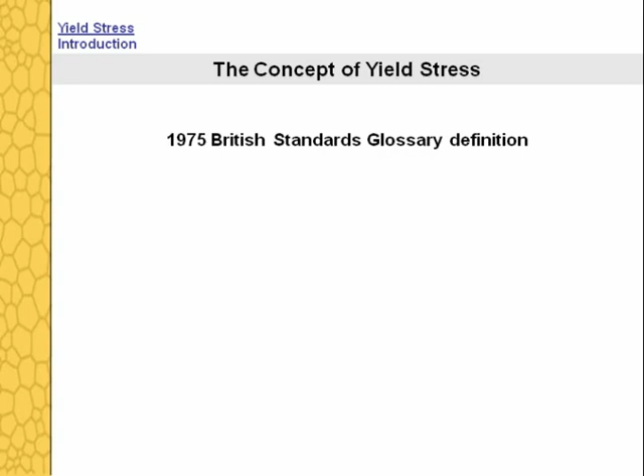It is probably true to say that the concept of yield stress is very well known to rheologists, and that most would be able to provide an acceptable definition. In this connection, the 1975 British Standards Glossary version would not be too far from that of most rheologists: it is that stress below which the substance is an elastic solid, and above it, a liquid.

It is also generally accepted that many everyday products seem to possess a yield stress, including clays, toothpastes, drilling muds, foams, plastic explosives, ketchups, all sorts of creams, and many other diverse materials.

In their book, Rheology, An Historical Perspective, Tanner and Walters point out that the concept of yield stress was apparently first described in detail by the Russian scientist Theodore Schwedoff in the late 1880s. Interestingly, Schwedoff introduced a variant of the well-known Maxwell equation of linear viscoelasticity. In this equation, sigma y is the shear yield stress.

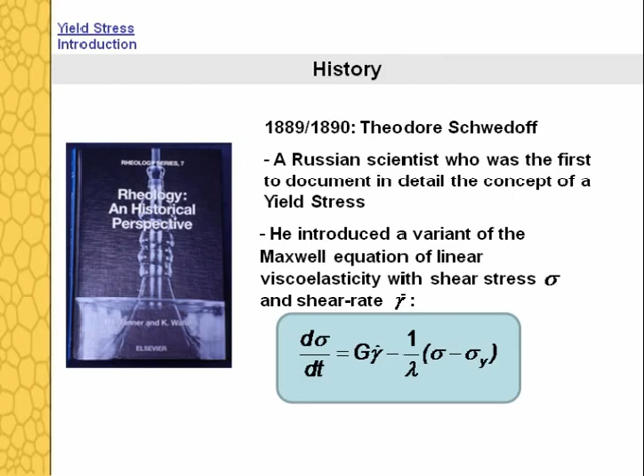Moving to the 20th century, the name of Eugene Bingham figures prominently in the unfolding yield stress story. Interestingly, it was Bingham, together with two friends, Reiner and Scott Blair, who were responsible for the introduction of the term rheology, and for the setting up of the first rheology meeting in 1929.

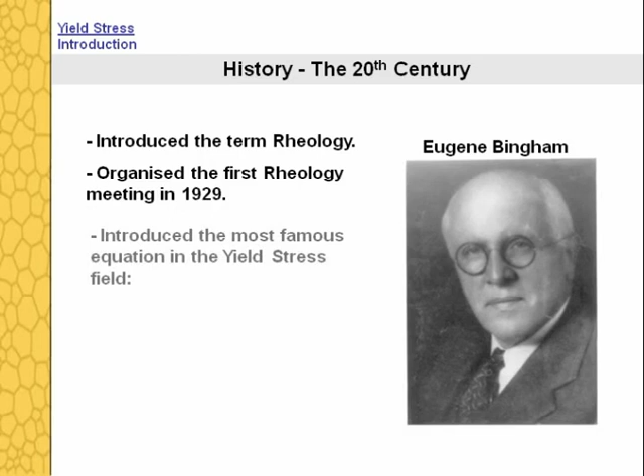Bingham was also to give his name to what has become the most famous equation in the yield stress field, called appropriately the Bingham equation, and originally introduced as early as 1916. Here, sigma y is again the yield stress, and eta p the constant plastic viscosity.

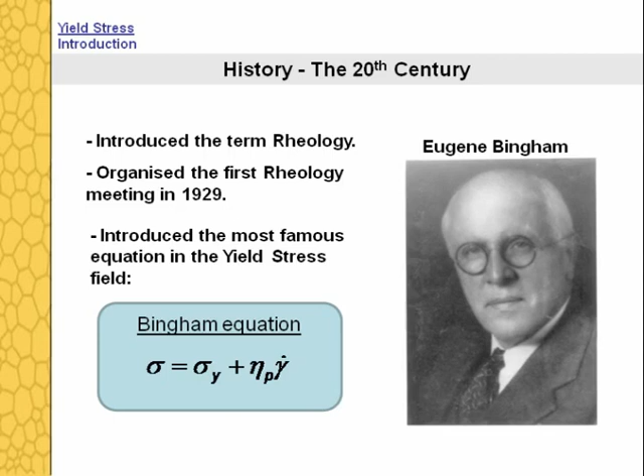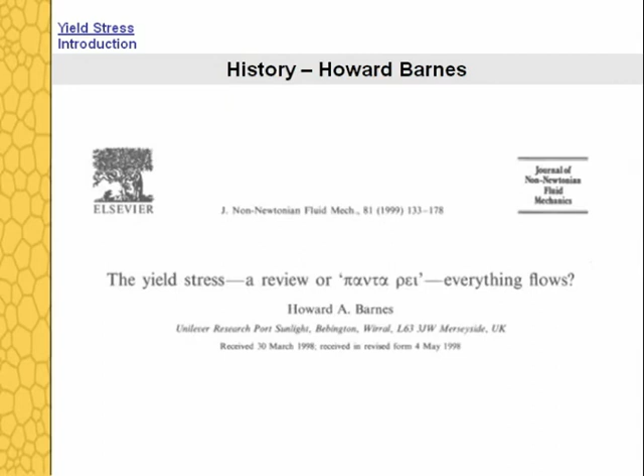Barnes has described these and related developments in a series of papers. Notable amongst the developments has been the search for generalizations of the Bingham equation, and the names of Casson, and of Herschel and Bulkley, have been assigned to the most popular.

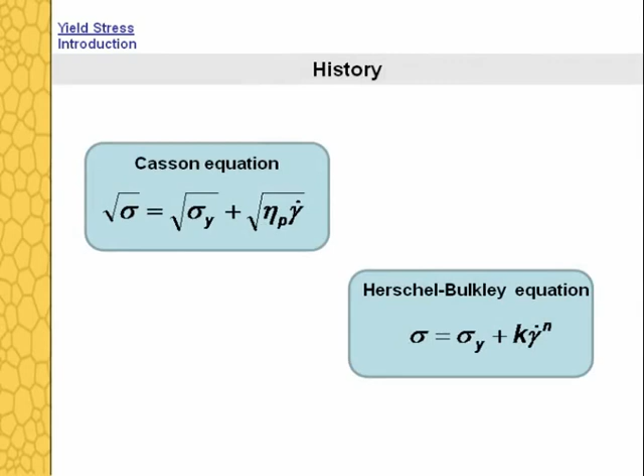Alongside these attempts to describe yield stress behaviour theoretically must be a discussion of the experimental evidence for the phenomenon. In this connection, an obvious example of a common material that seems to possess plastic properties is toothpaste, of course.

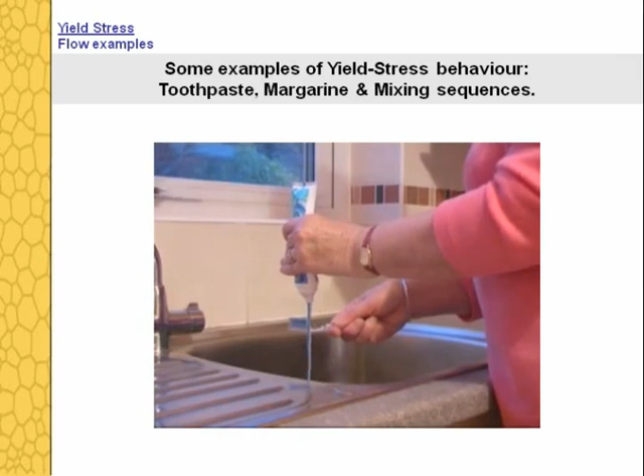For example, we expect a good toothpaste to be solid-like at rest, so that it will not flow under its own weight, in the tube or on the brush. It can easily be made to flow by applying a sufficiently high stress, and, in normal circumstances, it would have the necessary mobility involved in the brushing action.

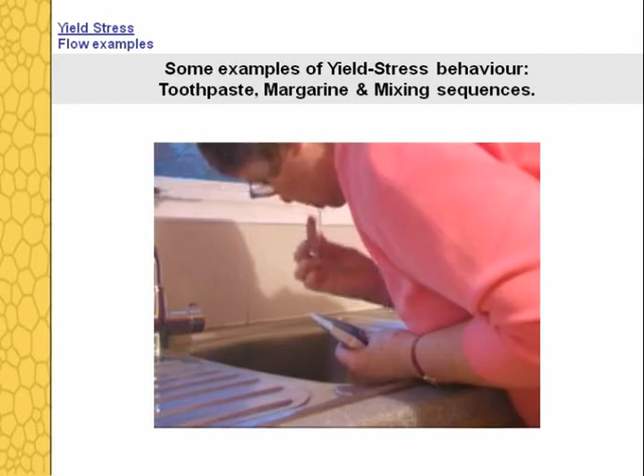Margarine is another example of a material that appears to possess plastic properties. Indeed, a good margarine must have convenient plastic properties over a range of temperatures, so that it maintains its block shape for long periods, and yet is spreadable.

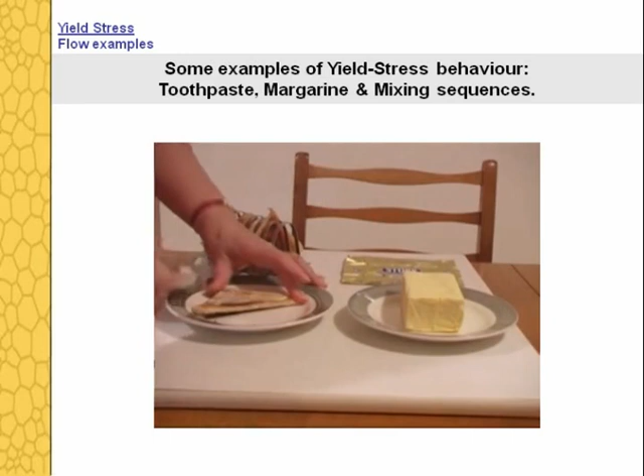Indeed, the old television advertisement made it quite clear that we should be able to spread a good margarine straight from the refrigerator. Or to quote another TV advertisement, it has to be firm on the knife but soft on the bread, i.e. solid-like at rest, on the knife, on the table, in the refrigerator, but liquid-like under the severe conditions involved in the spreading action.

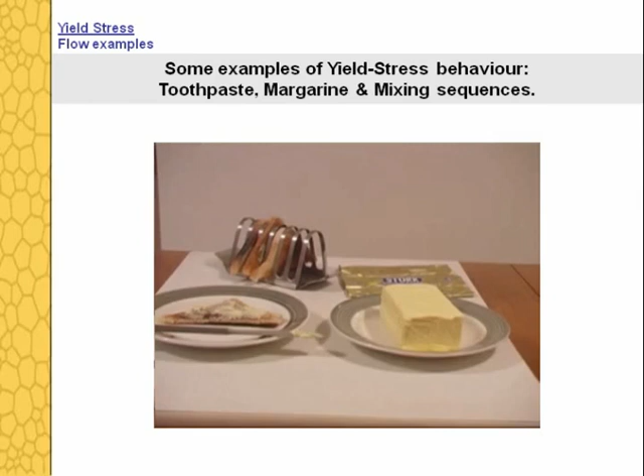Our colleague Howard Barnes has provided us with a good example of the practical utility of the yield stress concept. This involves the industrially important process of mixing.

Now before the test, the material around the lower impeller is coloured with a green dye, and the material around the upper impeller with a reddish-brown dye. This provides one simple way of estimating the degree of mixing as the shaft speed is increased.

The particular material in the present experiments is a 0.3% solution of carbopol in water, which is thought to possess a yield stress.

Clearly, in the mixer, the stress decreases the further we move from the impellers. When the stress in the carbopol solution drops below the yield stress, any motion appears to cease, and we essentially observe a solid-like response.

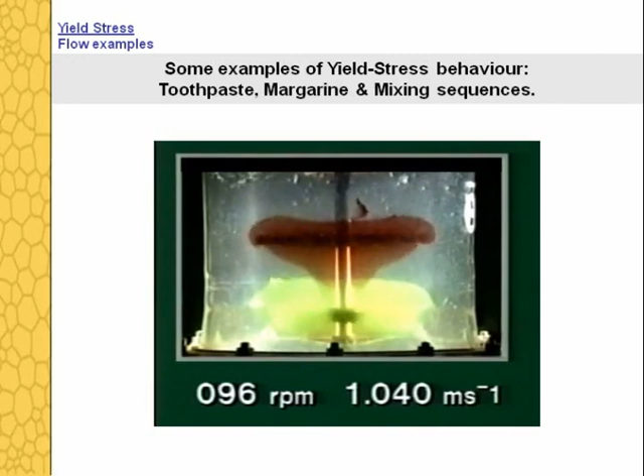Loosely, we can view the coloured regions as experiencing mixing, with essentially no movement, and therefore no mixing, outside this region. Not surprisingly, the coloured regions are seen to increase in size as the rotational speed of the impellers is increased.

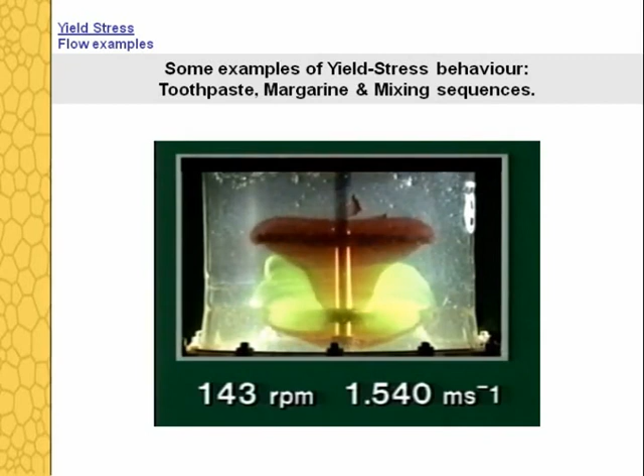The mixed region is called a cavern. Those who use this technique believe that the diameter of the cavern can be calculated from a knowledge of the power input, the mixer geometry, and the yield stress.

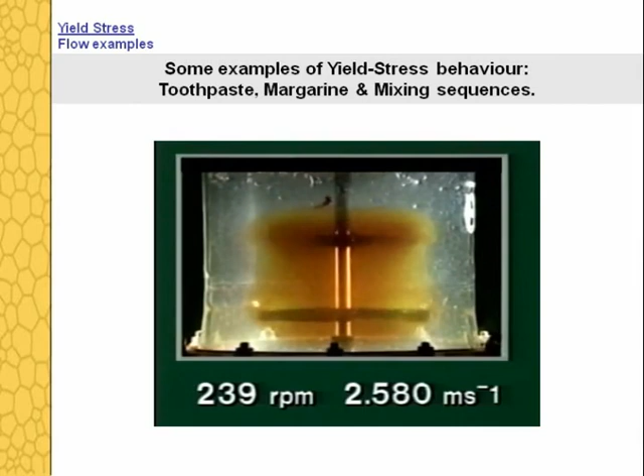Amongst the techniques commonly used to measure the yield stress are the slump test and the vane technique. To explain the former, we shall call on our collaborator David Boger to describe in his own words work carried out at the University of Melbourne in Australia.

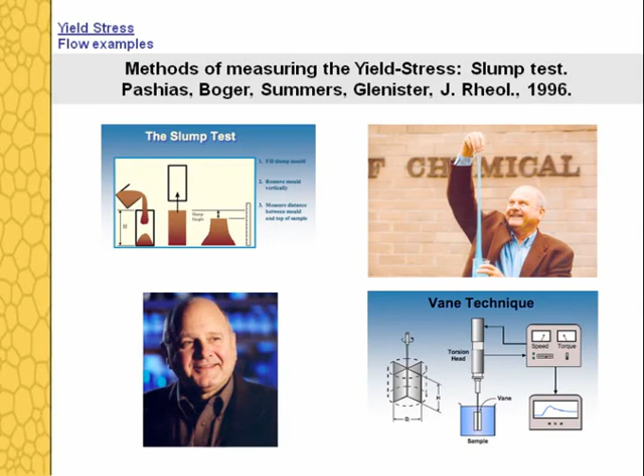The video sequence demonstrates a slump measurement utilizing a cylindrical slump rheometer, the 50-cent rheometer. The slump test was initially developed to determine the flow properties needed to measure the consistency of fresh concrete.

Here a large inverted cone placed on a solid surface was used, with the concrete loaded into the small end of the cone. The cone was then raised, and the amount of slump—the decrease in height of the cement relative to the original cone height—was measured as an indication of the flow characteristics of the concrete.

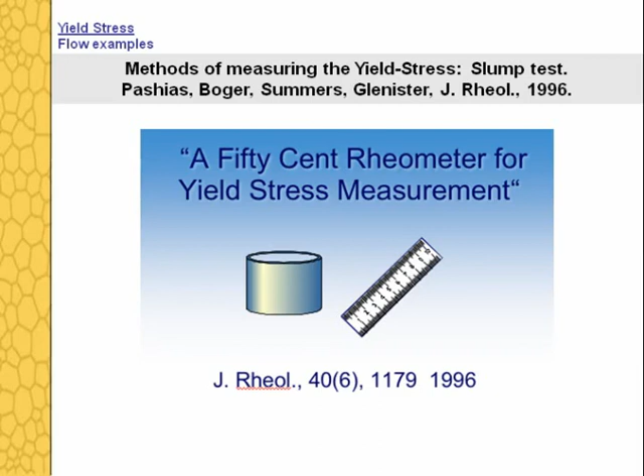The slump test, as it turns out, offers a quick and easy way of measuring the yield stress of suspensions without the need for sophisticated electronic equipment.

The slump itself can be related directly to the yield stress through a model originally devised for the conical slump test by Murata in 1984 and later corrected by Christensen in 1991. The conical case was deemed to be more complicated than necessary, and the theory was modified for yielding using a hollow cylinder.

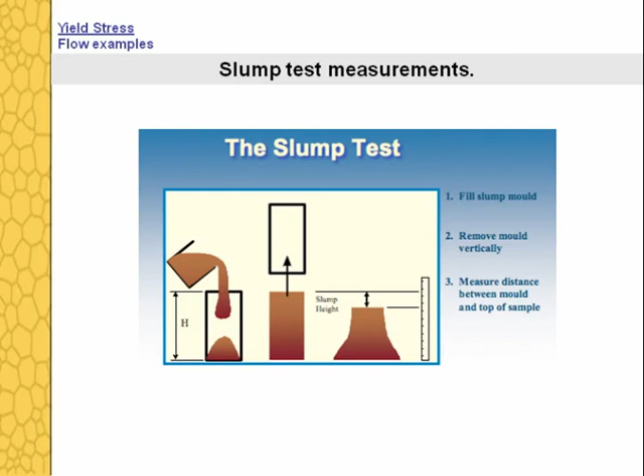The video sequence illustrates cylindrical slump measurements of a mineral suspension, a bauxite residue waste generated in the alumina industry. The cylindrical slump test and analysis was developed at the University of Melbourne in conjunction with Alcoa of Australia.

The first sequence illustrates the slump using a beer can, and clearly illustrates that the aspect ratio of the cylinder is too large.

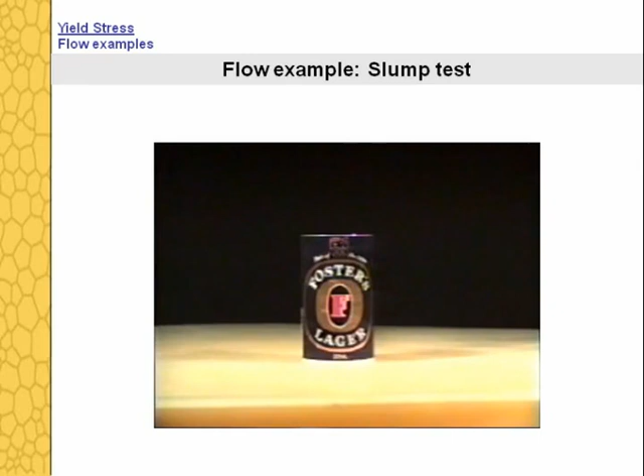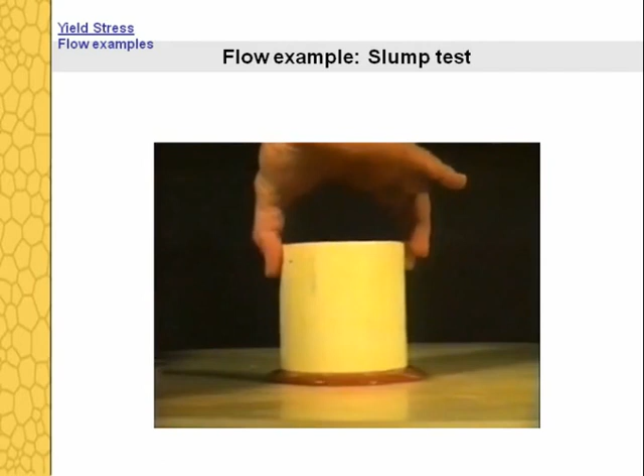The next sequence illustrates carrying out the rheological measurement itself, where the cylinder is slowly lifted, allowing the material to slump.

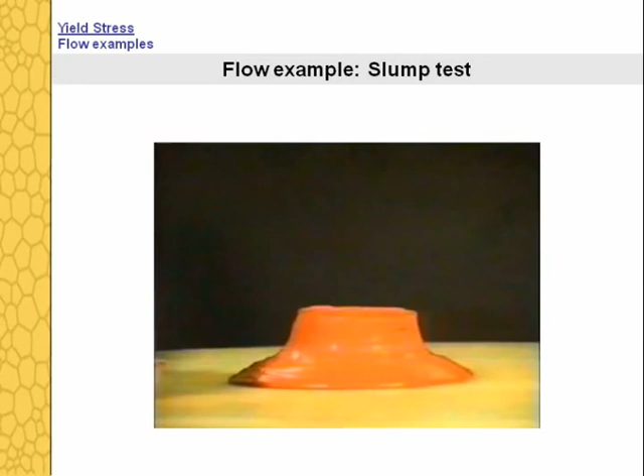In the next sequence, the slump height is measured with a ruler. This height is directly related to the shear yield stress.

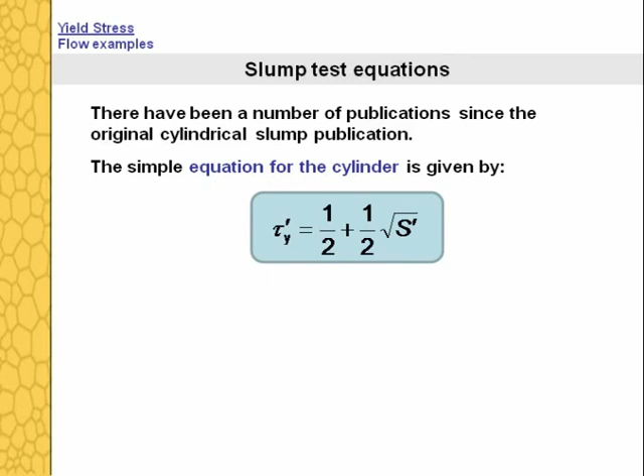There have been a number of publications since the original cylindrical slump publication where refinements have been made to the theory. But for practical purposes, the simple equation for the cylinder, given by tau y prime equals one half plus one half the square root of s prime, is sufficient for determination of the yield stress in industrial applications.

Tau y prime is a dimensionless yield stress given by tau y divided by rho g h, and S prime is a dimensionless slump height given by the actual slump measurement Z divided by the height of the slump cylinder H.

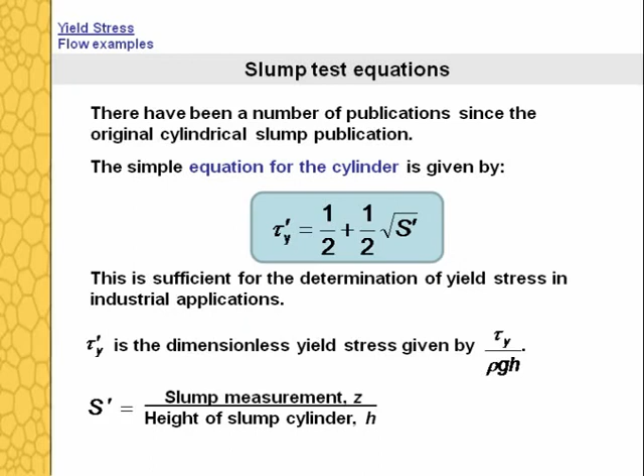In the foregoing, we have taken it for granted that the yield stress concept is soundly based, in both theory and experiment.

However, in 1985, Barnes and Walters caused quite a stir with the publication of a paper entitled The Yield Stress Myth.

The ideas were first put forward in 1984 at the 9th International Congress on Rheology, held at Acapulco, Mexico, and later published in Rheologica Acta.

Barnes and Walters provided experimental evidence that the derived yield stress for a PVA latex adhesive depended on the rheometrical device employed, and more particularly on the low shear rate range attainable.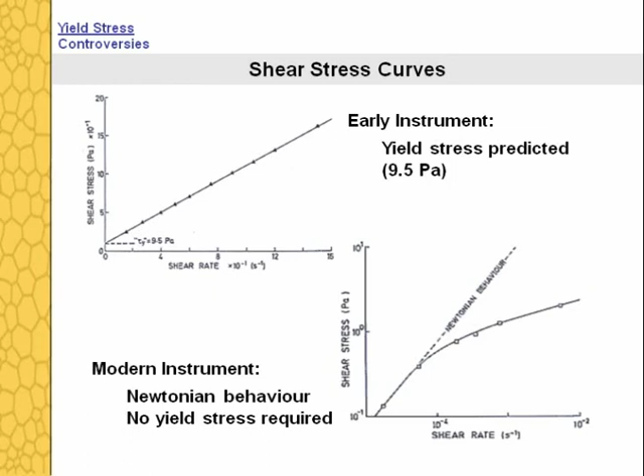From the data in the top picture, a yield stress of 9.5 pascals was predicted, while no yield stress was needed to interpret the data in the bottom picture. Here, Newtonian behaviour is in evidence at the lowest shear rates.

On the basis of this and other experimental data, Barnes and Walters postulated that if a material flows at high stresses, it will also flow, no matter how slowly, at all stresses.

Of course, there can be a drop in viscosity of several decades as the shear rate varies, and the so-called first Newtonian plateau viscosity can be very high indeed.

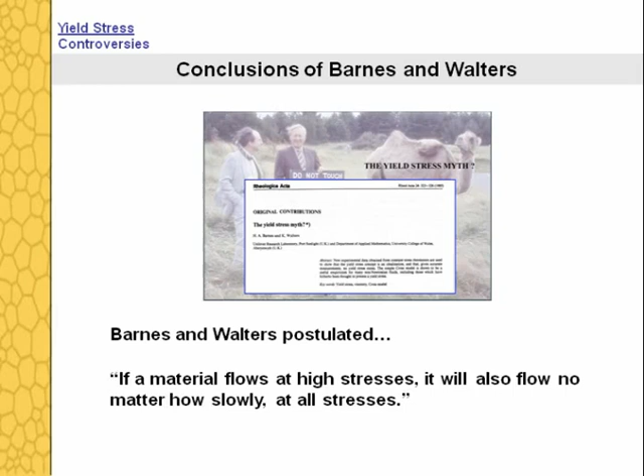In a series of later review articles, Barnes illustrated that, in many respects, shear stress is a more revealing variable than shear rate.

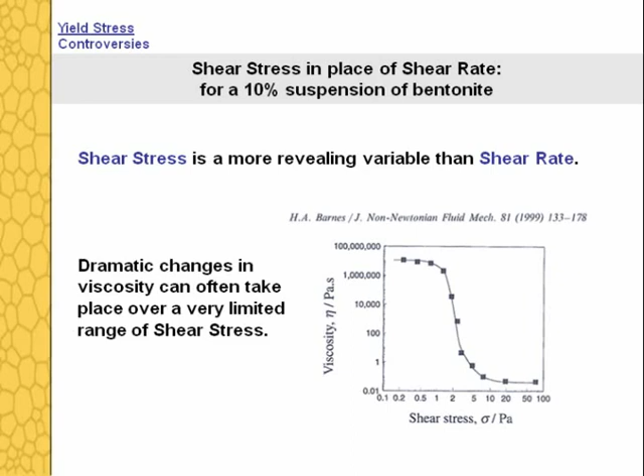Barnes went on to quote Malkin, 1994, who essentially suggested that it is reasonable to treat the behaviour of such a material at low stresses as solid-like, even though it is clearly a liquid. But it is a liquid with a very high viscosity at low stresses, so that it will flow very, very slowly.

In this sense, the dramatic drop in viscosity might be considered as a transition from solid-like to liquid-like behaviour. We shall return to this and similar ideas a little later.

The Barnes and Walters paper spawned a whole series of papers, expressing both support and opposition, and the debate seems to go on unabated.

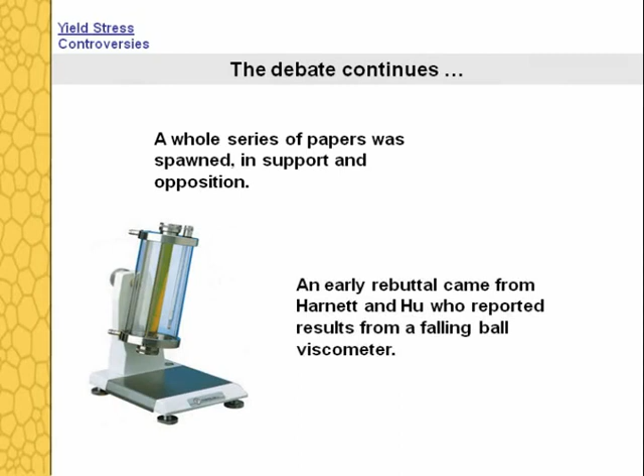An early rebuttal came from Hartnett and Hu, who reported results from a falling ball viscometer. Interestingly, they based their belief in a yield stress on the fact that a specific ball did not fall a measurable distance over a timescale of 3 months. This, in turn, led to a debate on what one should define as a measurable distance, and what a reasonable time of observation should be. We shall return to this and similar issues later.

In the meantime, we need to stress that Barnes and Walters were certainly not the first to question and reinterpret the yield stress hypothesis.

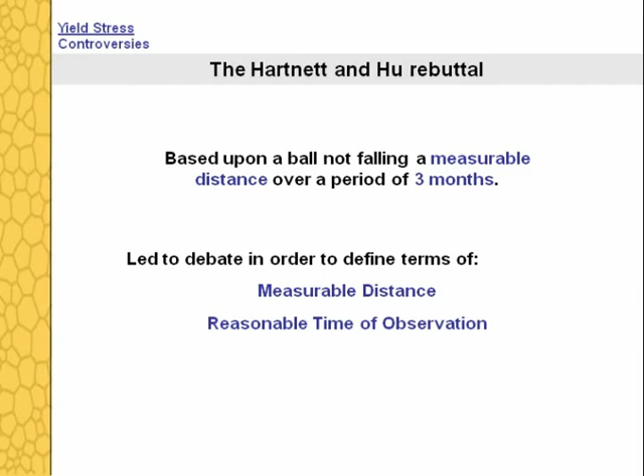For example, even at the first meeting of the American Society of Rheology in 1929, Marcus Reiner, one of the three organizers, when referring to Bingham materials, said there was no yield point.

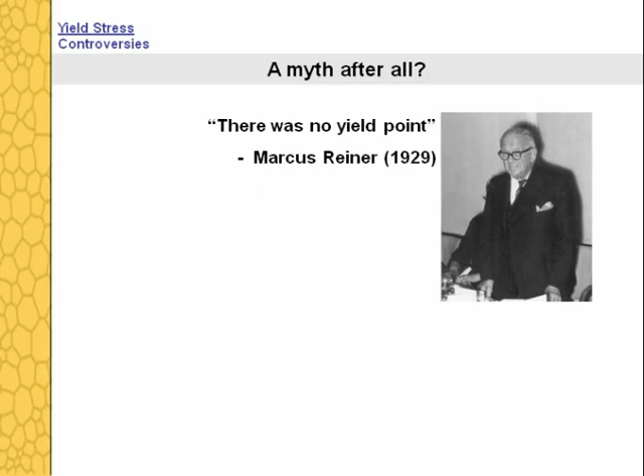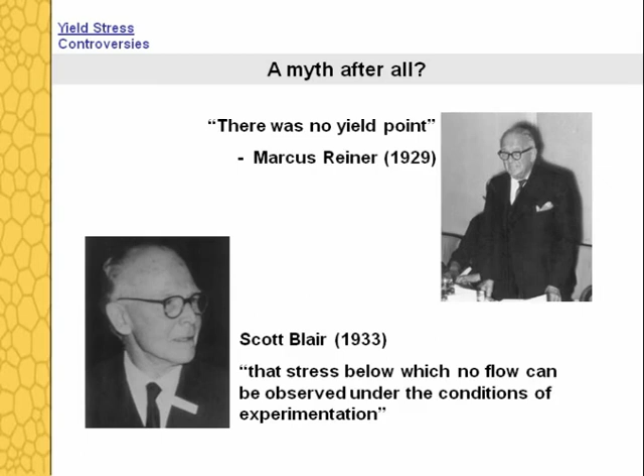A little later, in 1933, one of the other organisers of that famous meeting, the Englishman George Scott Blair, safely hedged his bets by proposing that the yield stress was that stress below which no flow can be observed under the conditions of experimentation.

Of course, some were more dismissive of the yield stress hypothesis and would have agreed wholeheartedly with the comments of Barnes and Walters.

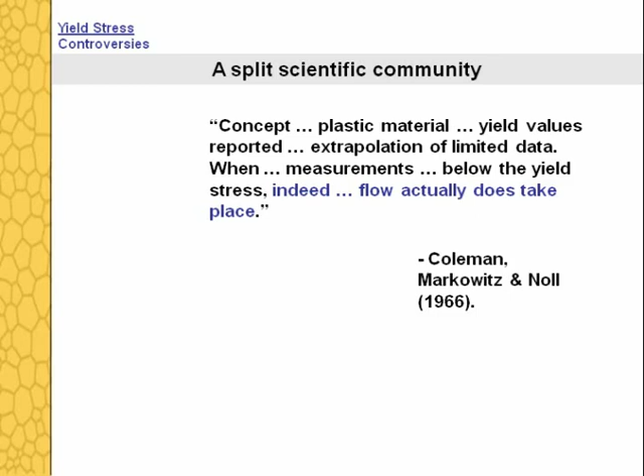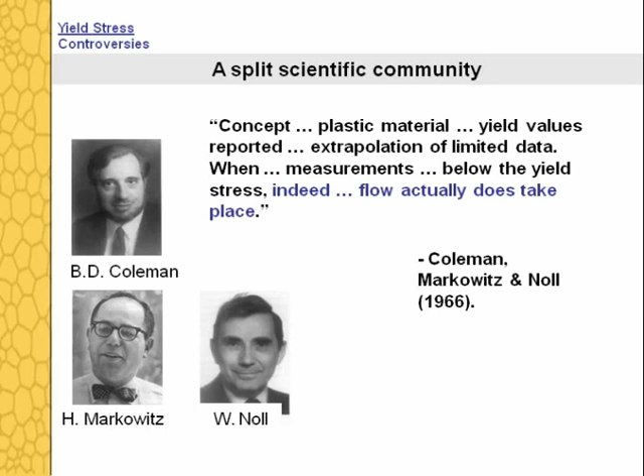So, for example, Markowitz, Coleman and Noll, in their influential 1966 book on rheometry, agreed that the concept of a plastic material has been greatly overworked, and almost without exception, the yield values reported have been obtained by extrapolation of limited data. When careful measurements are made below the yield stress, it is found that flow actually does take place.

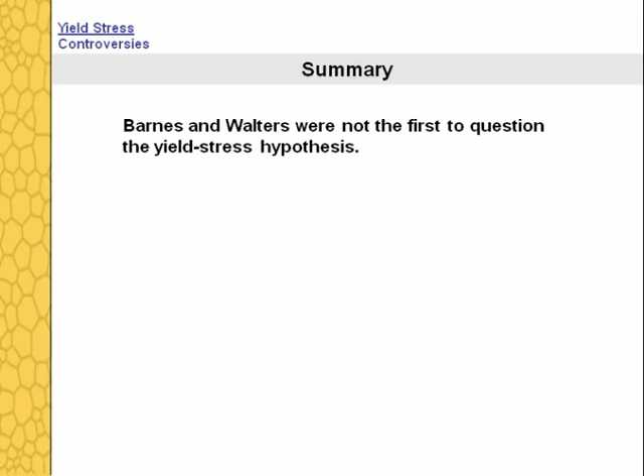All this means that Barnes and Walters were certainly not the first to question the yield stress hypothesis, but their 1984 paper did seem to catch people's attention and interest, and maybe their annoyance as well.

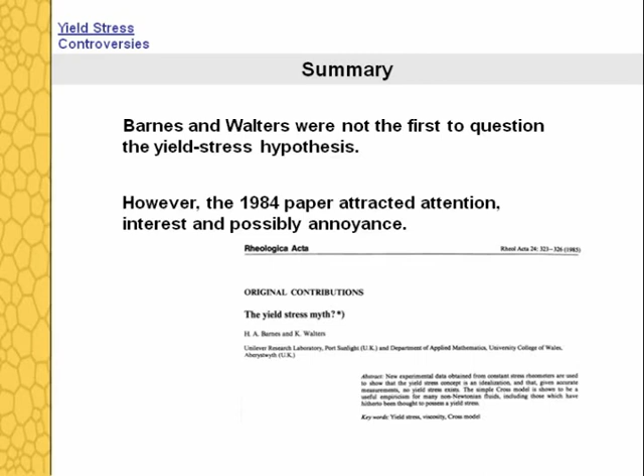Before leaving this section, we remark that if someone were looking for a classic example of a material that appears solid-like, near the rest state, and yet on closer scrutiny is found to be a liquid, they should look no further than the ongoing experiment conducted at the University of Queensland in Australia.

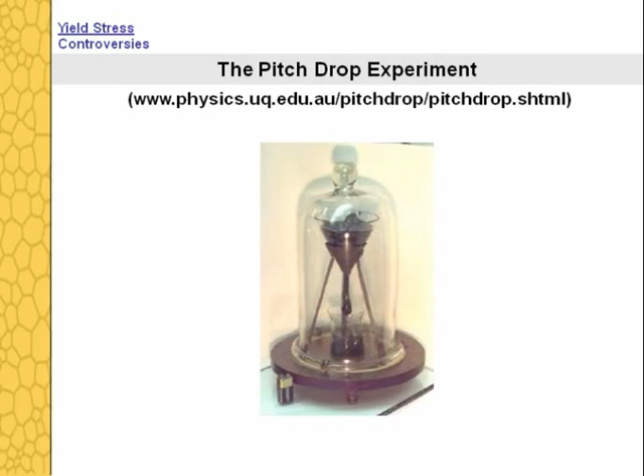Interestingly, the experiment is recognised in the Guinness Book of Records as the longest-running laboratory experiment in the world. The relevant website given on the screen provides the background.

The pitch flows very slowly, drop by drop. The 8th drop, since the experiment started, fell in 2000, and the 9th drop is only just forming. The pitch is estimated to be 100 billion times more viscous than water.

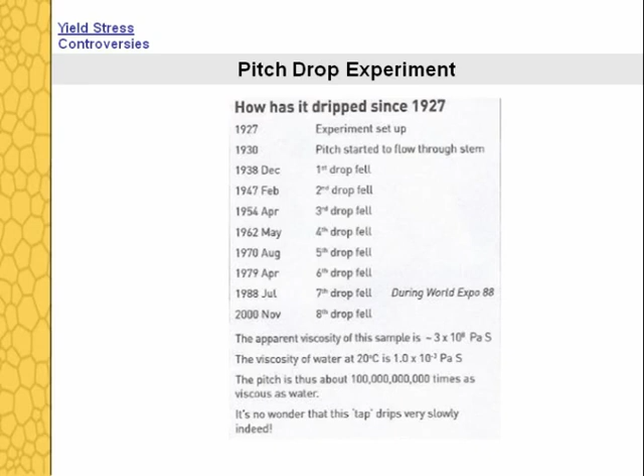We now need to bring things together and agree on those ideas and conclusions that would command general support. In this connection, the first thing we need to emphasize is that some materials that were once considered to have a yield stress have now been convincingly shown to be simply shear thinning fluids, but with a very high first Newtonian plateau in the limit of vanishingly small shear rates.

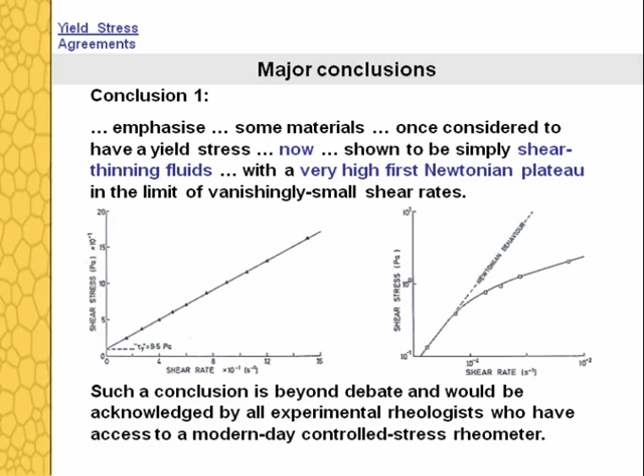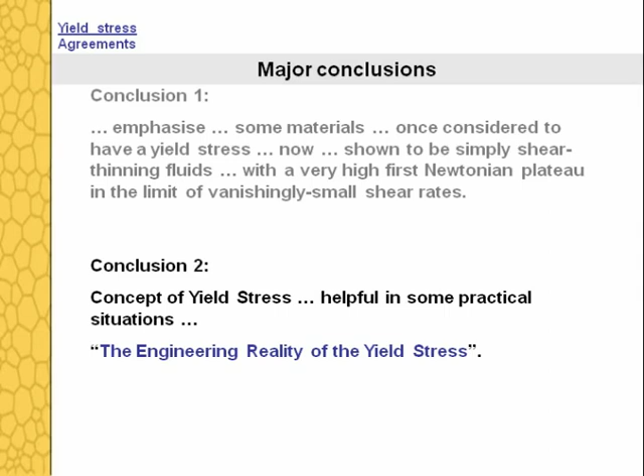Having said that, there is no doubt that the concept of a yield stress is sometimes very helpful in practical situations, and in that sense, we can talk of the engineering reality of the yield stress. Indeed, the late Professor Gianni Astarita chose this as the title for a short and humorous letter to the Journal of Rheology in 1990.

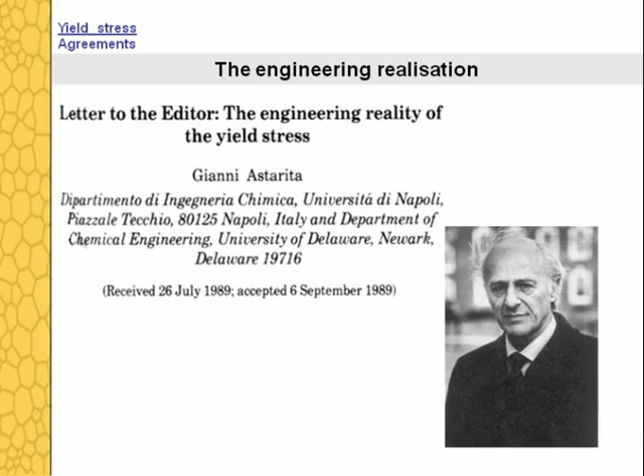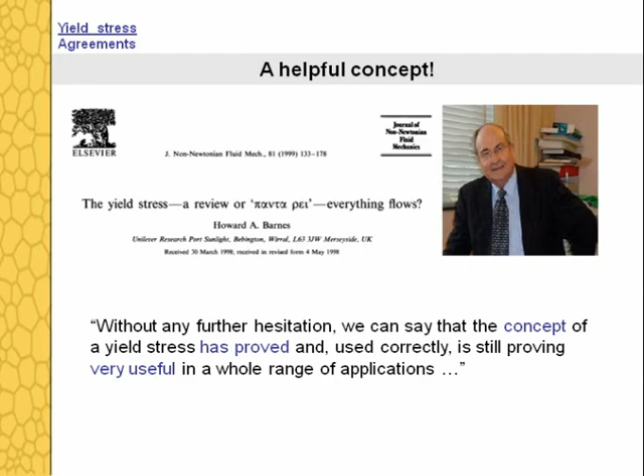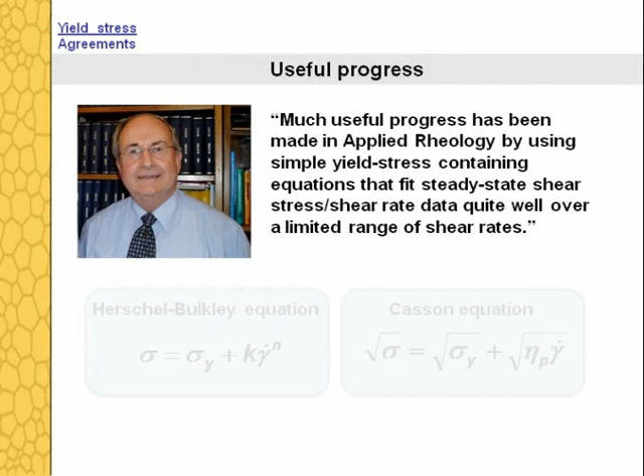One of the authors of the original yield stress myth paper, Howard Barnes, is happy to agree. In his extensive 1999 review article, he states, 'Without any further hesitation, we can say that the concept of a yield stress has proved, and used correctly, is still proving, very useful in a whole range of applications.' In another place, Barnes affirms that much useful progress has been made in applied rheology by using simple yield stress containing equations that fit steady-state shear stress shear rate data quite well over a limited range of shear rates.

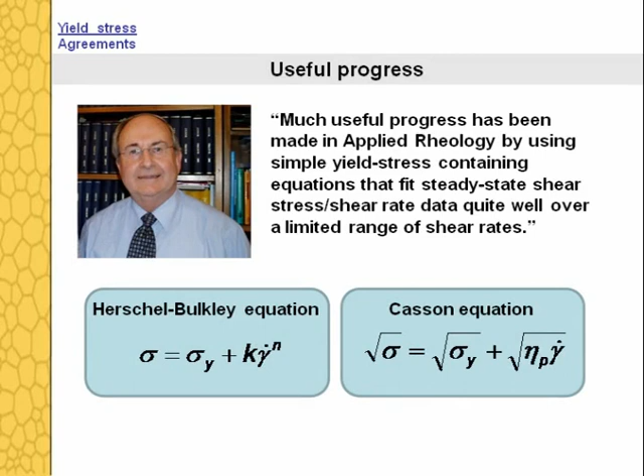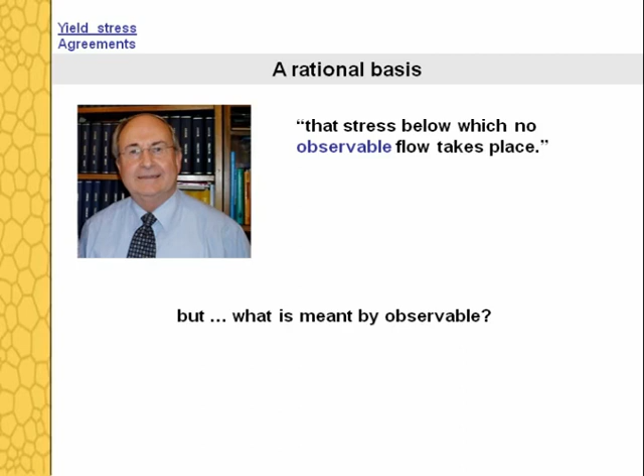And in yet another place, Barnes is also happy to affirm that the determination of a yield stress has a rational basis when we define it as that stress below which no observable flow takes place. Of course, this leaves open the question as to what we mean by observable. And this is something else that has occupied the attention of more than one rheologist.

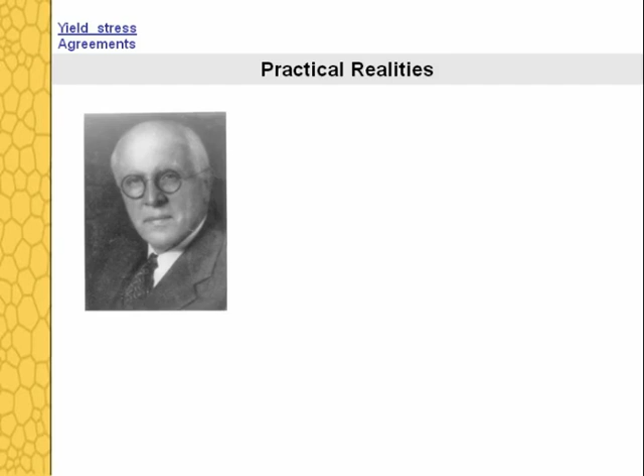However, to move from concepts to practical realities, we can do no better than refer to the thoughts of Bingham himself on the matter. In addressing a subject that everyone would be conversant with, he wrote, 'The paint must have a yield stress value high enough so that it will not run under the influence of gravity, but the mobility must be high enough so that the painter may spread it without undue fatigue.'

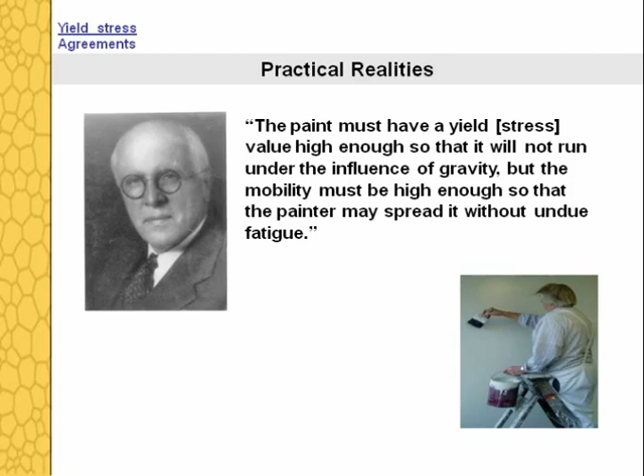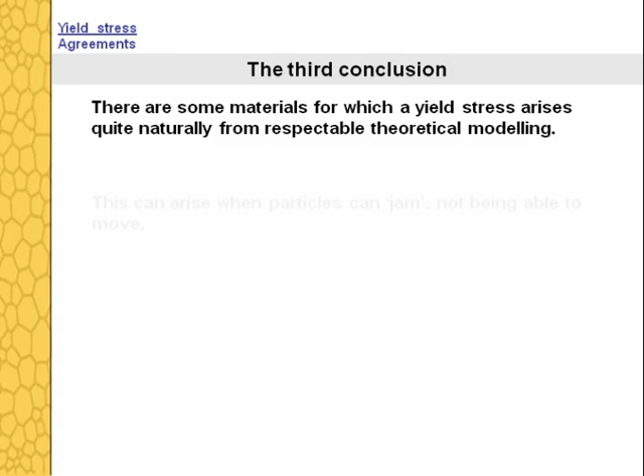The third thing we must mention is that there are some materials for which a yield stress arises quite naturally from respectable theoretical modelling. This can arise, for example, in the case of concentrated suspensions, where one can postulate circumstances where particles jam and are not able to move.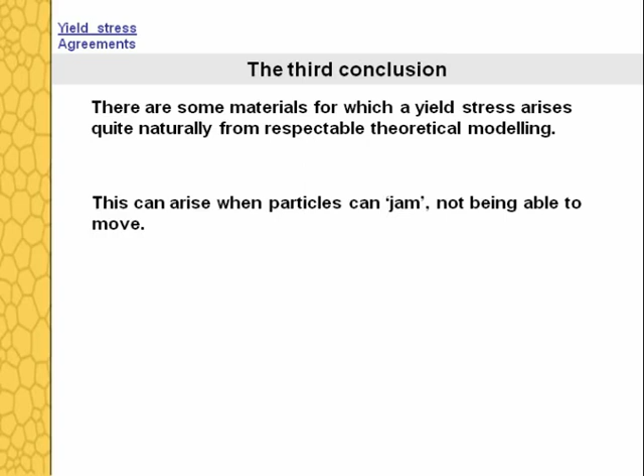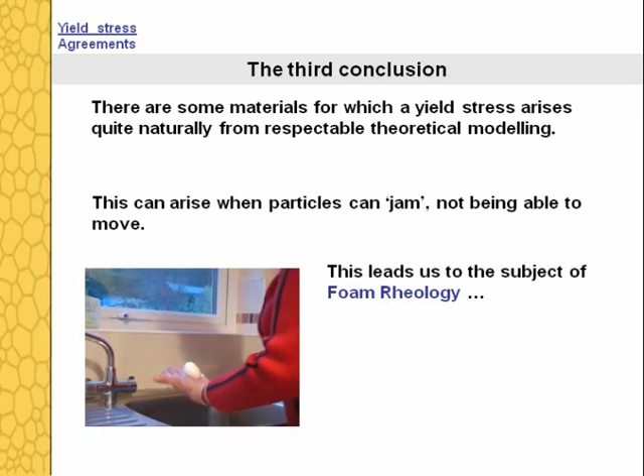Foam rheology is another area where essentially the same thing can occur, and we shall now describe the mathematical modelling of a two-dimensional foam using the ideas and videos of our colleague Simon Cox.

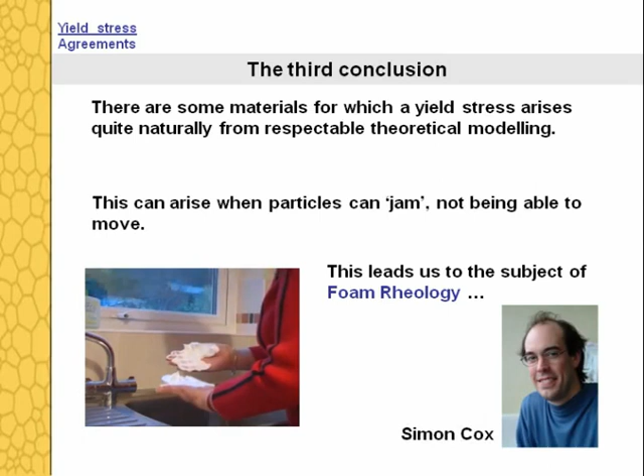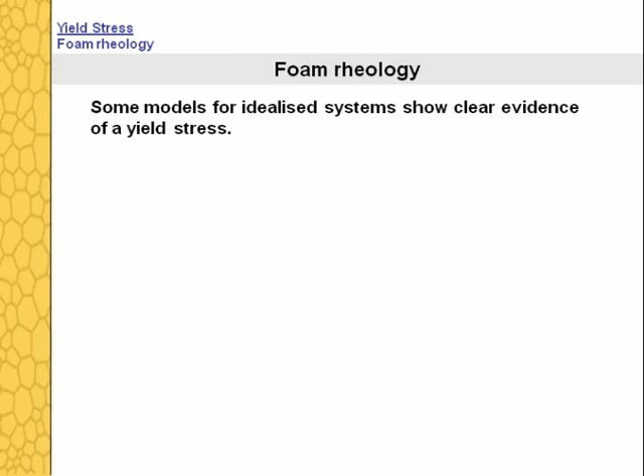Turning now to theoretical considerations, some models for idealised systems show clear evidence of a yield stress. Our colleague Simon Cox has provided us with one such example. This concerns the behaviour of a two-dimensional foam, such as can be made by squeezing a washing-up foam between two parallel glass plates.

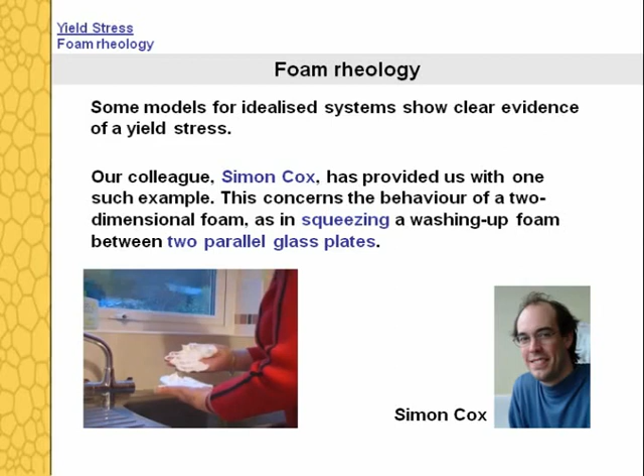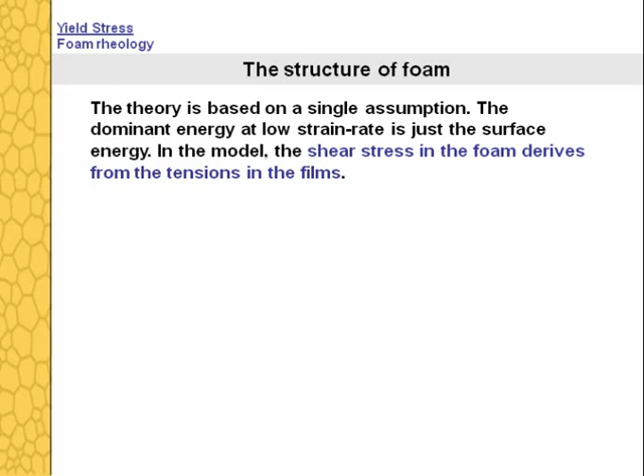The theory is based on a single assumption, namely that the dominant energy at low strain rate is just the surface energy. In the model, the shear stress in the foam derives from the tensions in the films. There is a random distribution of bubble areas, and the films that touch the upper and lower walls are fixed to the wall, and in the case of the upper wall, move with the wall.

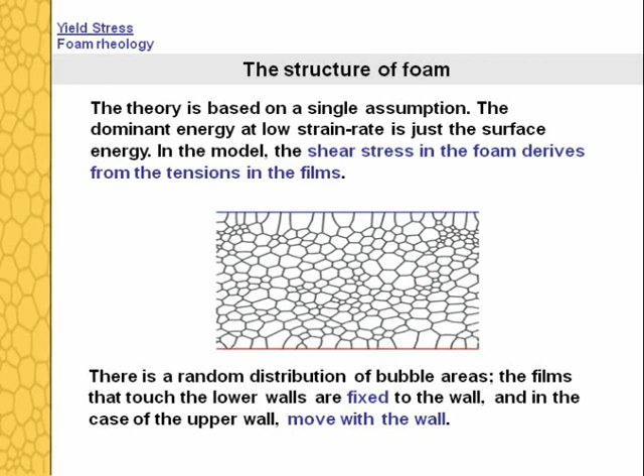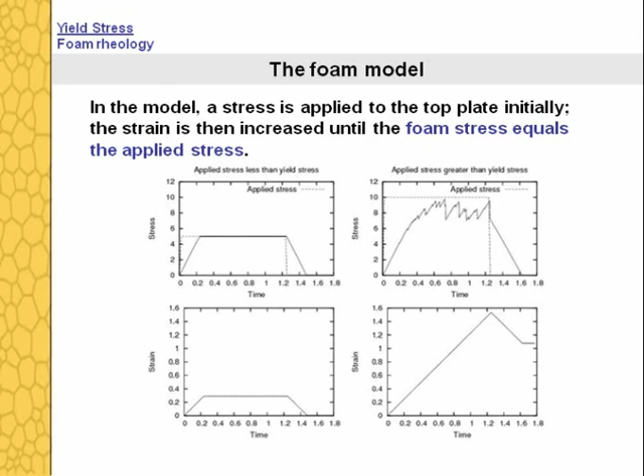In the model, a stress is applied to the top plate at time zero, and the strain increased until the foam stress equals the applied stress. At a later time, corresponding to t equals 1.25 on the graphs, the applied stress is suddenly removed, and the foam left to recover. We shall show the predicted behaviour of the foam for two values of the applied stress.

In the first, the stress is low. Few topological changes occur, and to all intents and purposes, the foam responds elastically, remaining stationary for most of the simulation, before returning to something close to its initial state after the stress is removed.

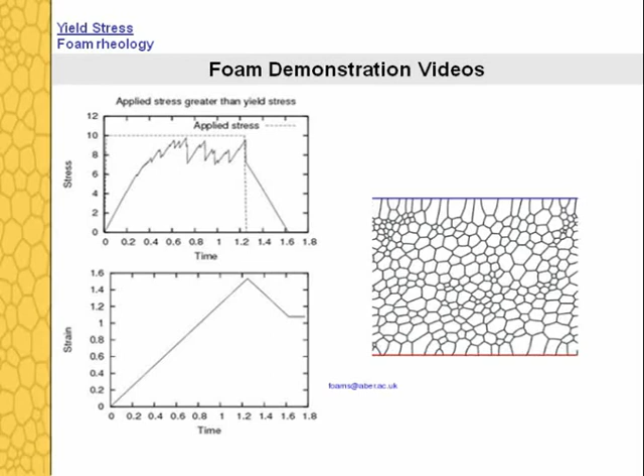For a higher stress, many topological changes occur. The foam never jams, and does not return to its initial state when the applied stress is removed. Here we clearly see fluid-like behaviour. Loosely, we can say that the first applied stress is below the yield stress, and the second is above that stress.

So, here we have a respectable theoretical model for a material system which clearly illustrates the possibility of a yield stress, with the foam behaving like a solid below a certain stress and like a fluid above that stress.

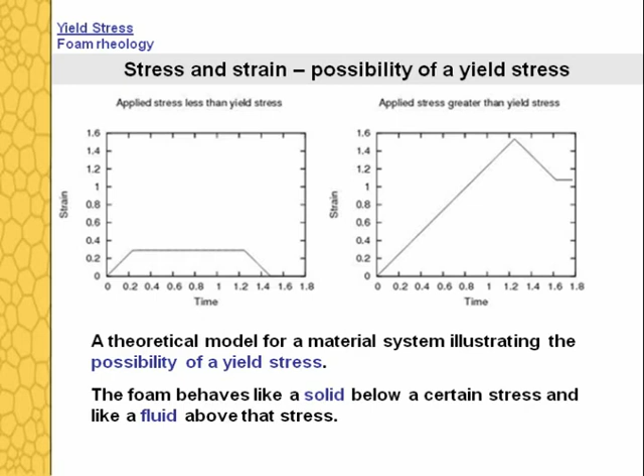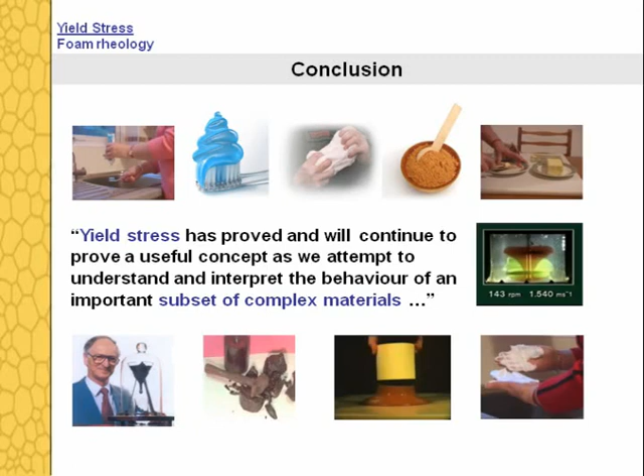So, the story is told, and amongst all the detail that has gone before is one overriding conclusion, namely that yield stress has proved and will continue to prove a useful concept as we attempt to understand and interpret the behaviour of an important subset of complex materials.